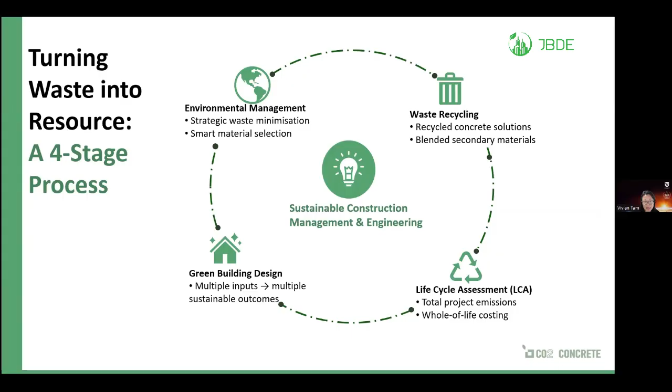You may see in here what is really the driving force for sustainable construction, since it is my major research area. Some people will look into climate change, or some are looking into protecting the environment, particularly in this perspective. But I think it's also very important to look into why the public needs to do it, what's the awareness to do it.

Do they have any financial incentive or financial benefits? Not only maybe the instant benefit, like the short term, but also looking into long-term components as well. And a lot of research also likes to look into energy efficiencies. How can the energy even help reduce the cost in this component?

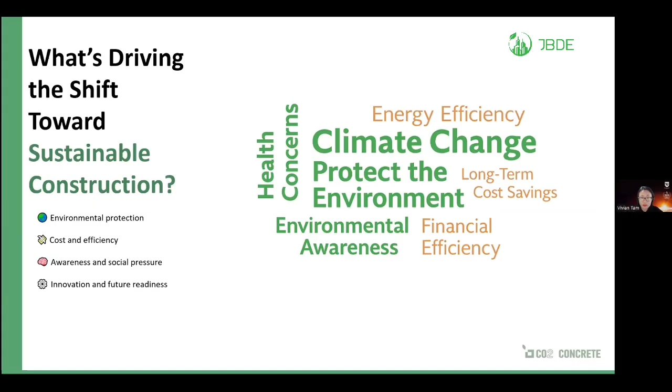There are three major trends that I can see when we are doing sustainable building or sustainability construction in here. The first one I want to highlight is the growing focus on healthy building materials. Building materials could be recycled materials or could be some other reusable materials. But the terminology of healthy is also looking into the long-term component as well. That means not only that you can reuse it again, but also how you can continuously help in terms of a healthy, productive environment in the long term.

Another one is the emphasis on embodied carbon. Because the net zero component is so important, a lot of us are looking into how we can achieve the carbon zero target. And all of those are looking into how we can really improve embodied carbon consideration as well.

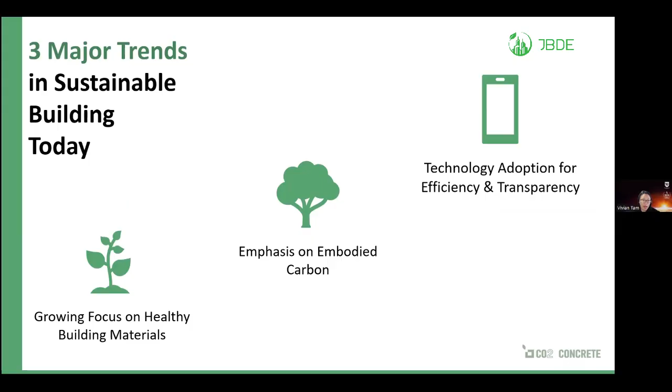And I have to say that we have to look into technologies if you want to look at those. Purely adopting the materials or purely reusing or recycling may not be able to achieve what we want, particularly for the building industry. That's why technology adoption is relatively important in looking into how we can embed it with the sustainable building component in here.

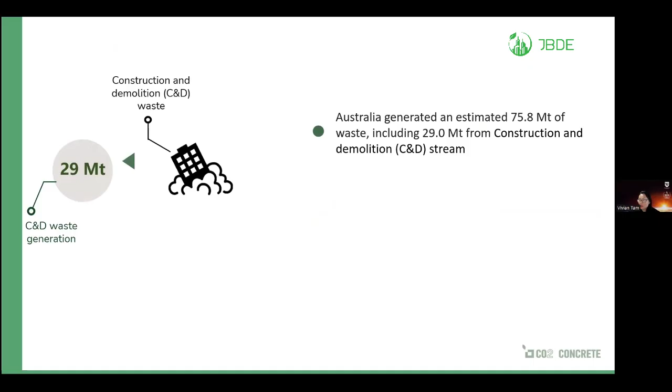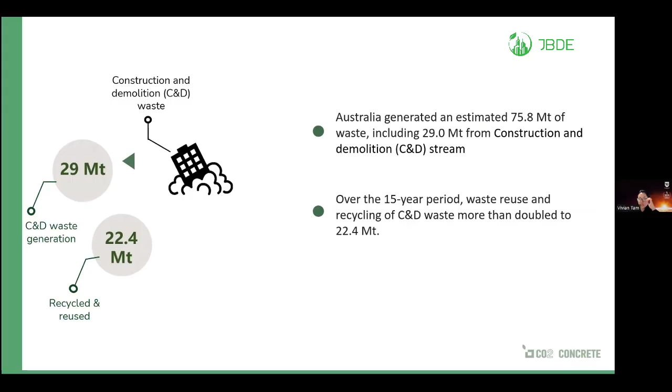Based on the Australian data, we have roughly about 29 million tons of construction and demolition waste every year. And we have recycled about 22.4 million tons, which is relatively high. But the thing is, we are not able to reuse it as a high-grade component. Most of it is still mainly used for low-grade recyclability options. That means when we want to use the materials as a replacement for virgin materials, it will be difficult to use. That is what the existing market looks like.

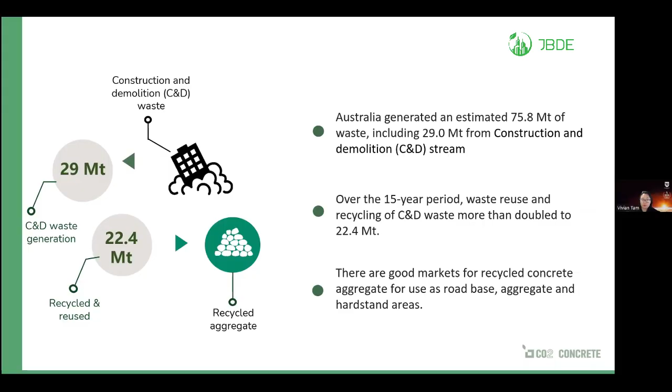Looking into construction and demolition waste recycling, a lot of people also like to see a four-step approach. Different people use different terminologies, but their approach is very similar. First of all, obviously, we try to prevent producing the waste, to not even generate the waste. But sometimes we have to generate waste, because for some activities on site you cannot just order the right amount. You have to order a little bit extra in case anything happens, and that means we will generate waste.

If we have to generate the waste, do we have any approach to separate the different types of waste? Because most waste is generated mixed together, which makes it very difficult for us to further reuse or recycle it as well. So separation is the second option.

And then the third level of waste recycling is treatment. Once we do the different kinds of waste sorting, we need to look into how we can treat the specific waste with the technology component. And when the product is mature, we also need a very mature market to support the use of those materials as well.

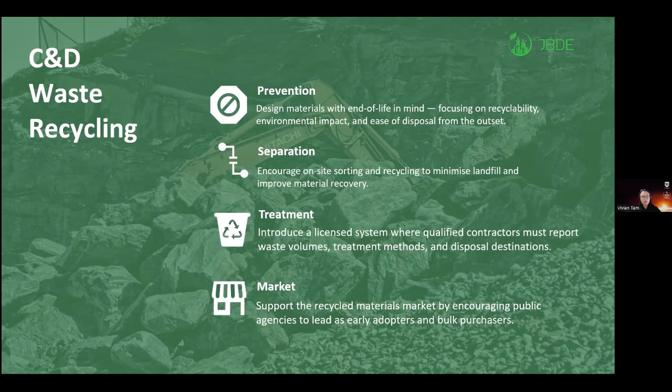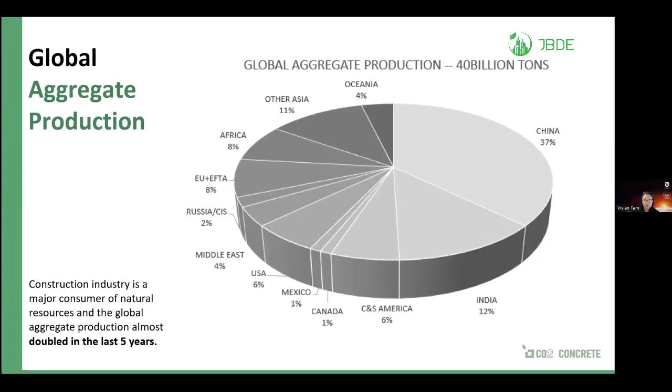I want to particularly focus on aggregate for today's presentation because I want to look into the research on recycled concrete. As you can see in here, global aggregate production is really high. It has doubled in the last 5 years, and the majority is generated from China, with over 37%. You can also see here a relatively comprehensive table highlighting different regions in the world, how much construction and demolition waste they produce, how much is recovered, and the recovery percentage as well.

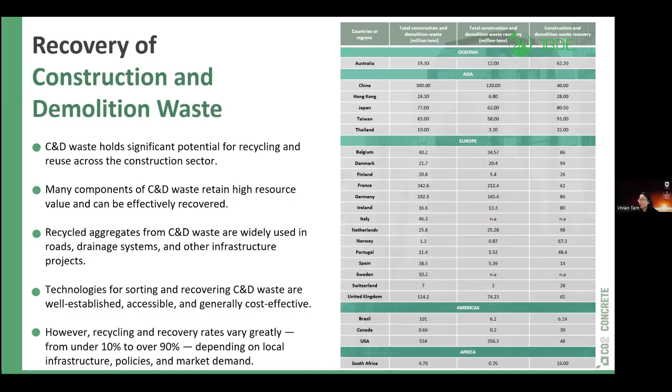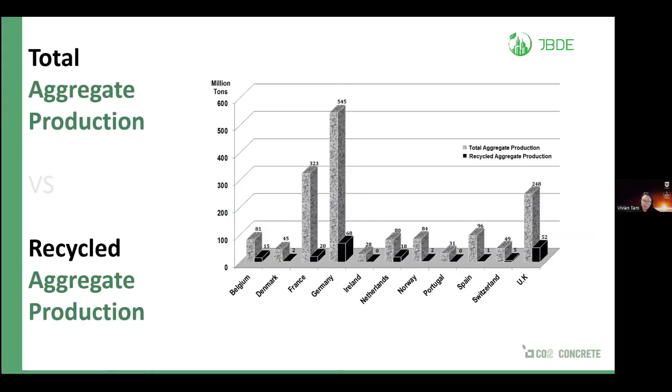Looking into the different kinds of aggregate production, you can see that the lighter bar is the total aggregate production, but the darker bar, which is the recycled aggregate production, is significantly low. That means we are not really able to use recycled aggregate for the majority of our aggregate production. Even when we use recycled aggregate, the majority is still mainly used for low grade. We are not able to use it for anything basically above the ground.

That is something that we will need to look into. There are a lot of different reasons behind it, but we will need to see why they are only mainly using it for low grade. And that doesn't mean that we cannot use it for better than just low grade applications.

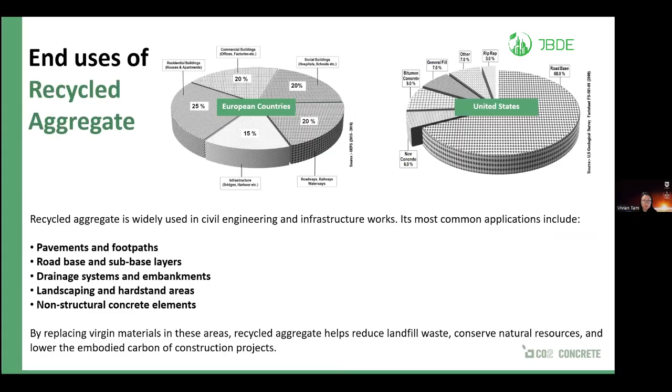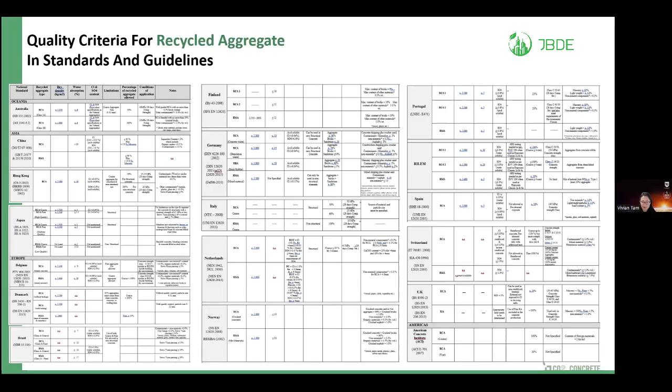That means we are very limitedly allowing the use of recycled materials in our standard guidelines. And that also gives hesitation in the industry to use this particular product, because there are no standards allowing it.

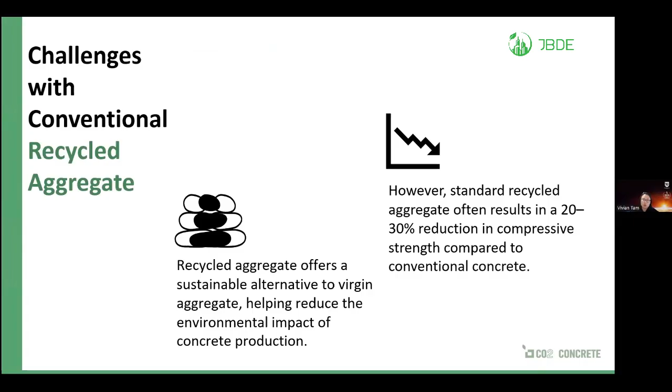And bringing it into the challenge, I think very clearly you can see that recycled aggregate is going to be an alternative to virgin material, and they actually reduce the environmental impacts of concrete production. However, because the performance is relatively lower compared to virgin aggregate, normally about 20 to 30% reduction in strength, it is also limited to different applications compared to what concrete is supposed to be able to be used for.

And we also have limited standards, as I highlighted in the last slide. There are limited standards and specifications allowing the industry to utilize recycled products. And we also don't have sufficient financial incentives. There's no encouragement for the industry to use these recycled products. And sometimes in certain countries, the C&D waste recycling facilities are a little bit far, so it's a bit hard to use recycled products compared to nearby sources of virgin materials.

It also has supply and demand issues, depending on how much we want, how much we can produce, and for what specific purpose. But I have to say, all in all, customer perception is probably the most difficult one to achieve. A lot of the industry is showing interest, but they may not have the confidence to use it because there are limited examples in the world that allow us to use it confidently. I often say in different magazines and interviews that the perception from the industry is still very limited here.

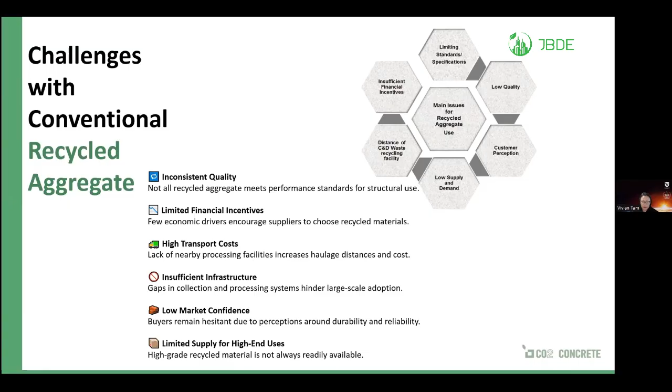And there's another idea for the recycled aggregate market. There are different directions showing approaches we could look into to help the market achieve better. For example, you can look into different taxations, including taxation on mining for sourcing virgin materials, and also taxation on landfills, which is mostly applied around the world already. That means we have a high tax on landfills compared to using or recycling products. And the third one is the availability and cost of recycled and virgin products. Most commonly, recycled products are significantly cheaper compared to virgin materials.

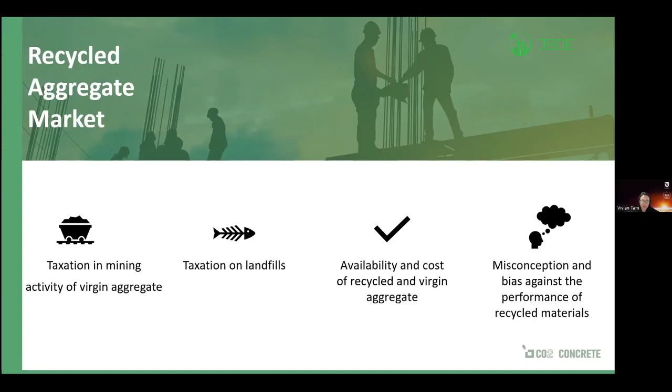That also helps us to boost the market in usage. But the last one, as I also mentioned in the last slides, there are misconceptions and also bias against the performance, because industry always thinks that a recycled product is something that is generally weaker. That's why it's very hard to pass that perception and also the bias in terms of adoption as well.

There are a few innovations in concrete in the recent market I also want to highlight here. You can see that there are a lot of different kinds of technologies. 3D printing, I think most of you heard about that, or different approaches to using concrete products, like different mixing designs or the healing process. The second one you can see here is using smart materials. A lot of them are using different kinds of products, such as carbon nanotubes or different nanomaterials, to put into the recycled concrete to help improve its performance. But that may also affect whether it can be recycled again as well.

And the third one is sustainability. A lot of us are actually looking into recycled concrete, low carbon concrete. Probably a lot of you also heard about that, and carbon capture and utilization. I mean, how can we really capture the carbon in the atmosphere and reuse it effectively? And often life cycle assessment is also brought in as well.

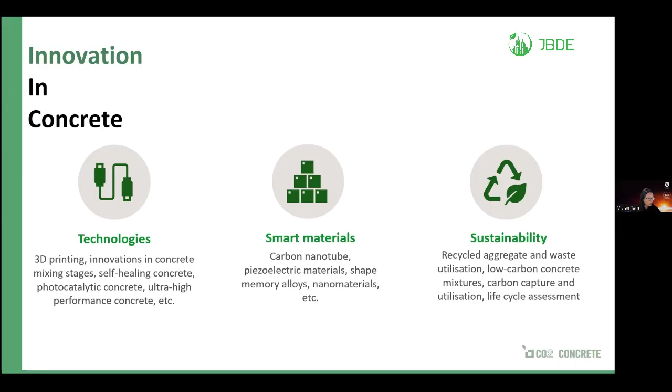From here I also want to highlight a little bit more on low carbon concrete. I don't know how many of you heard about low carbon concrete, because in Australia it's a really hot topic at the moment, probably for a few years now. What is low carbon concrete? It is concrete produced with a lower carbon footprint than traditional concrete. The cement component has the highest carbon emissions in concrete production.

That's why a lot of low carbon concrete is actually looking into reducing cement consumption. That means it is substituted with cement substitute materials such as fly ash or slag, most commonly. But we also have different kinds of cement substitute materials being generated to help produce this low carbon concrete. Overall, the idea is that low carbon concrete has a lower carbon footprint in terms of the life cycle components. That's what we call low carbon concrete.

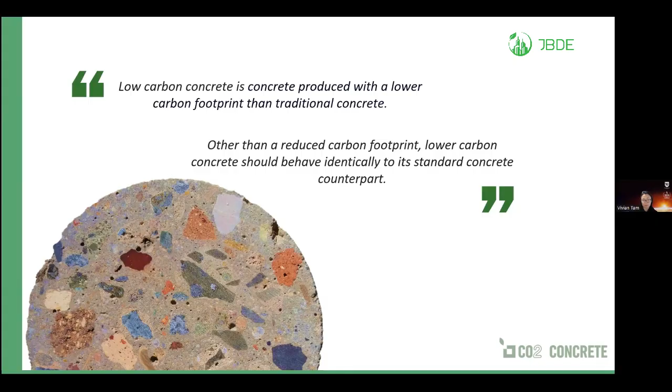From here on, I want to highlight one of the products, one of the inventions that has been invented over the last couple of years in the laboratory. In 2022, this particular product joined a CSIRO accelerator program. From then on, it actually made a big difference in terms of the impacts that we can produce with CO₂ concrete. Here you can see CO₂ concrete. We are naming it a concrete for a sustainable future.

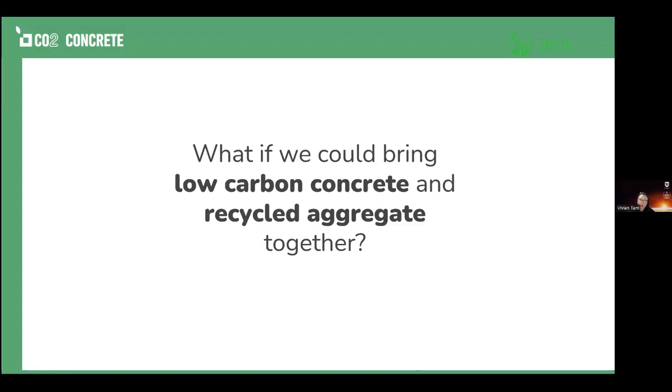I mentioned low carbon concrete is mainly looking into cement substitute materials. A lot of us are thinking, what if we could bring low carbon concrete and recycled aggregate together, because low carbon concrete uses cement substitutes, but we didn't recycle the waste component. What if we also replace the virgin material with recycled materials, that is recycled aggregate? That's why these two are a very good marriage together. That also helps concrete reduce embodied carbon and embrace a circular solution. That means we can recycle and recycle again, reduce emissions and also permanently sequester the carbon emissions as well.

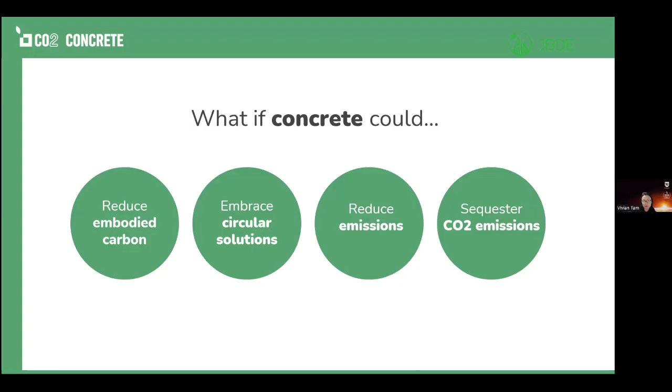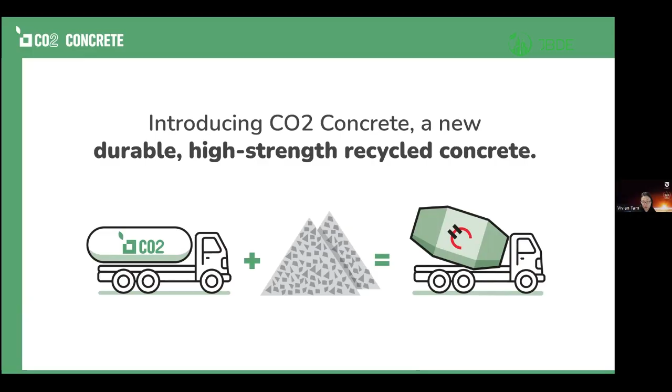That's why here I want to introduce CO₂ concrete to you. It is a new durable high-strength recycled concrete. What exactly is it? CO₂ concrete is a new process to produce durable and high-strength recycled concrete. We inject carbon dioxide into the recycled aggregate, mainly to improve its bonding, and then the rest of the process is the same. When the aggregate is improved, the recycled concrete performance will also be improved.

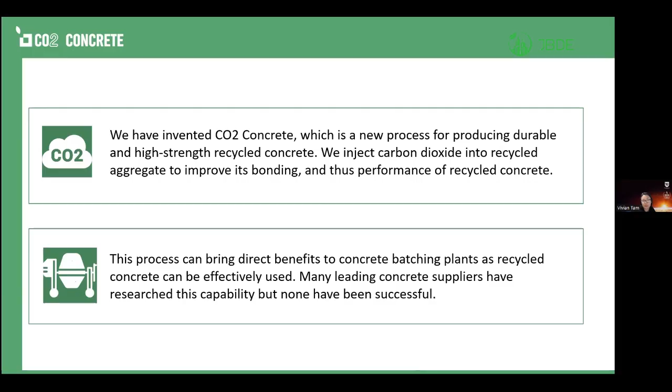It's about 50 centimeters by 50 centimeters by 30 centimeters, which is just really like a small black box. And you can put only about 50 kilograms of aggregates in. But in 2018, because we had slabs that needed to be poured for the universities, which require a relatively larger amount of materials, at that time we actually produced a commercialized scale carbonation chamber.

How we arrange it is the aggregate is put on top. Normally we use a bulk bag because we can put 1 ton of material in. We put in the bulk bag and then they will do the magic in terms of the carbonation inside. Once the carbonation process is done, the aggregate will come out at the bottom. Then we lift the whole chamber up using the heavy lifter in the laboratory, and then the materials can go out. And this is how we carbonate the materials. I cannot tell you exactly the process of how we're doing it because it is under a confidential agreement.

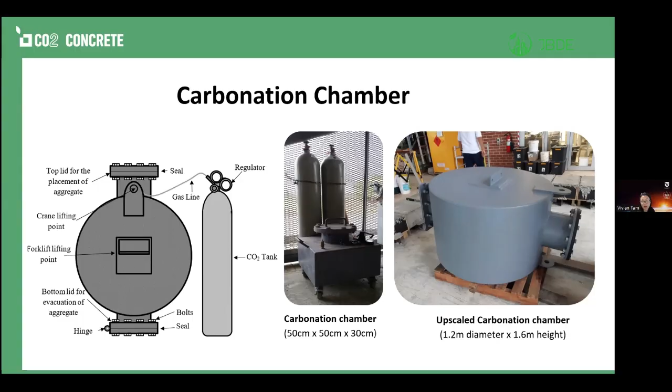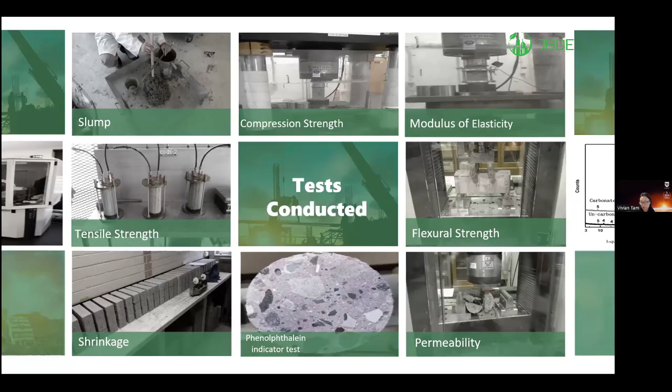And in the last few years in the laboratory, we have done any kind of test that you can imagine, not only the aggregate tests, but also the concrete tests as well. We have done the physical and mechanical properties, but also some of the durability tests and also the chemical behavior.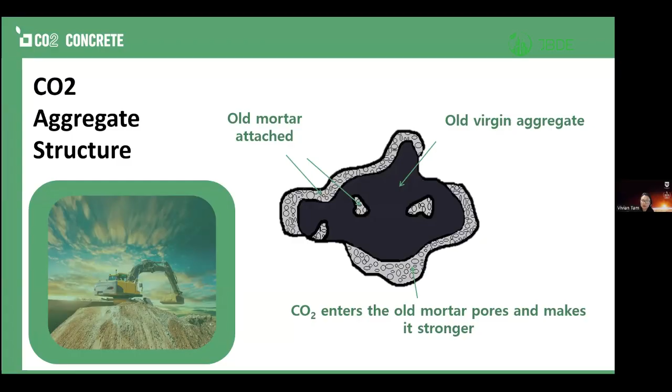You may ask me how exactly it works in terms of the recycled aggregate or the carbonation process. You can see that in the aggregate component, because it is a recycled aggregate, they not only have the old virgin aggregate attached, but they also have the cement mortar attached as well. Those are actually the weak components of the recycled aggregate. That is also the reason why the strength is reduced, because of the old cement mortar. But while we are carbonating the recycled aggregate, the carbon dioxide actually reacts with the cement mortar to help make it stronger. That is how this carbonation process works.

You can also see in this particular slide what virgin concrete looks like. If we purely replace virgin aggregate with recycled aggregate, at 100% replacement, the strength goes down about 30%. But by injecting carbon dioxide in, the strength actually goes back up, matching the performance of virgin concrete.

Not only does the performance increase, the cost is also efficient. In rough data, it is about $300 per cubic meter for virgin concrete. Because recycled aggregate in general is about half the price of virgin aggregate, the cost will go down, but the strength also goes down. By injecting carbon dioxide into the recycled aggregate, the strength goes up, and although the cost will go up, overall we still have about a 10% cost reduction in the 100% CO₂ concrete compared to virgin concrete.

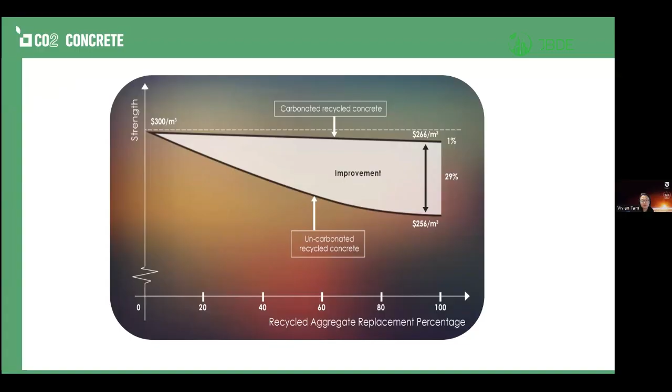If the company can tell this model what the input looks like, that means what the mix design looks like, how much you want, you can also put your restrictions in as well. Say, for example, you don't want to use more than 50% of the recycled aggregate. You can put those in as well. Then we'll be able to tell you how strong that concrete will be, what its behavior is, I mean, how many MPa the concrete will have.

Or alternatively, a lot of industry will be looking at it the other way: I want to achieve a 35 MPa concrete, you tell me how to do it. That means from output to input. And here I can also do that as well. That means you can put in the target strength and certain kinds of limitations. Say, for example, you want to reduce the amount of cement or reduce the amount of aggregate.

We can also put those in, then I'll tell you how to do it. That means it's a two-way component: you can give me an input, I can tell you the output. Or you tell me what output you want, I can tell you what inputs are required. That's why this particular model is very efficient in terms of the mix design component here.

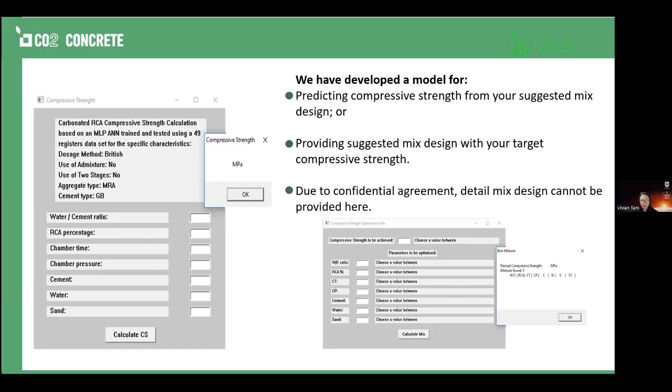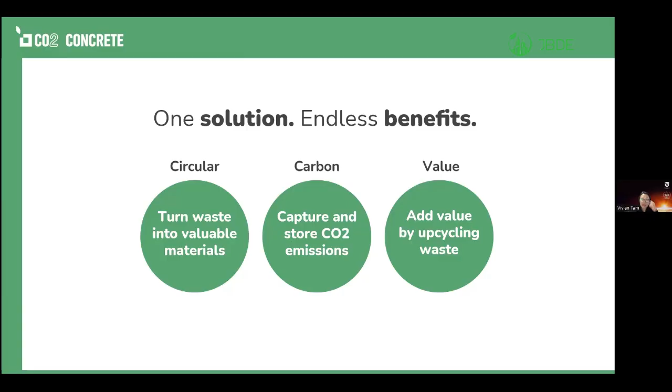And you can see that this project is able to bring one solution to endless benefits. Not only about helping the circular components, we can turn waste into valuable materials, but we can also permanently sequester and store the carbon emissions in the concrete. Because the behavior of the concrete also improved, we actually upcycle the waste and provide added value products in this particular component.

During the hosting program, we were able to produce a commercial video to help explain how this production process works to the industry. We have produced a 90 seconds video here. Please let me know if you can't hear it.

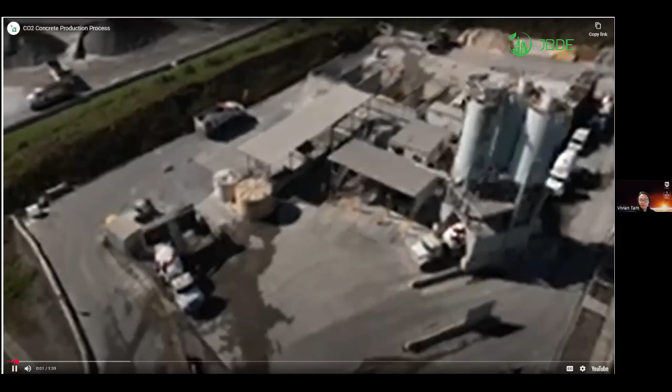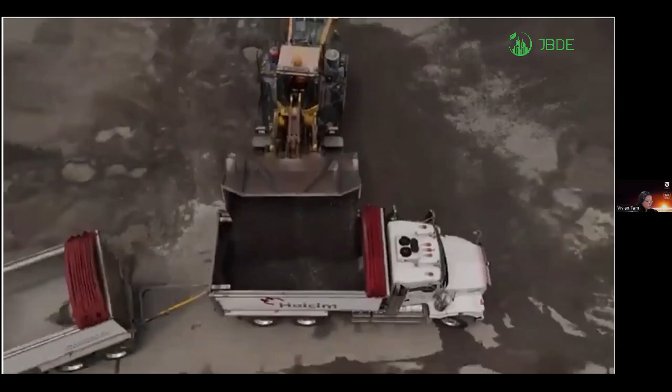The world is in a race to reduce the amount of human-induced carbon being emitted into the atmosphere. One of the biggest emitters of carbon is concrete. After water, concrete is the most widely used substance on the planet. In just the time it took to get to this point of the video, 19,000 bathtubs of concrete have been poured. Traditionally, when a building is demolished, the old concrete is never repurposed, making its way to landfill. What if there was a way of not only recycling the concrete, but also using the concrete as a vehicle to capture and store carbon created during the manufacturing process?

Introducing CO₂ Concrete, a revolutionary new durable high-strength carbon capture concrete that uses recycled aggregates in conjunction with low-carbon cement. These treated recycled aggregates are fed into a chamber where they are injected with CO₂, which not only improves the quality of the aggregate, but also its performance. The CO₂ treated aggregates are then taken to a concrete plant to be used in the final concrete mix. The result is a more sustainable building with a reduced carbon footprint. This is a truly circular economy solution that turns construction waste into recycled materials without compromising performance. CO₂ Concrete.

Okay, this is just a very quick video highlighting what we have done so far. Sorry, I did mute it.

Okay, and for this particular 9-month program, we were also targeting 3 main milestones to achieve. One is to determine the viability, to ensure that our business model works and the life cycle component works as well. Another one is the demonstration slabs. We have poured a few slabs; I'll show you a little bit later. And the last one is the communication strategies, in terms of different kinds of social media. You can also see this PowerPoint is designed in a different way because that is also part of our communication strategies.

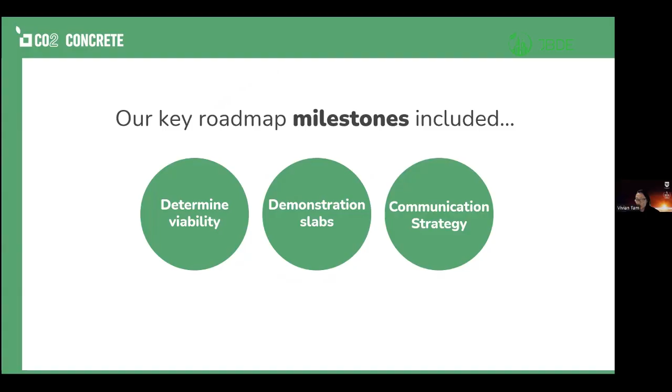This research has been conducted in the laboratory over the last 10 years now. As I mentioned, one of our main goals in this project is to produce the commercial demonstration slabs. We have done different kinds of slabs in the university environment, but we were really keen to produce commercial slabs. That's why in October 2022, we managed to pour the first commercial concrete at the Blacktown Animal Rehoming Centre. It's still at the Blacktown Rehoming Centre.

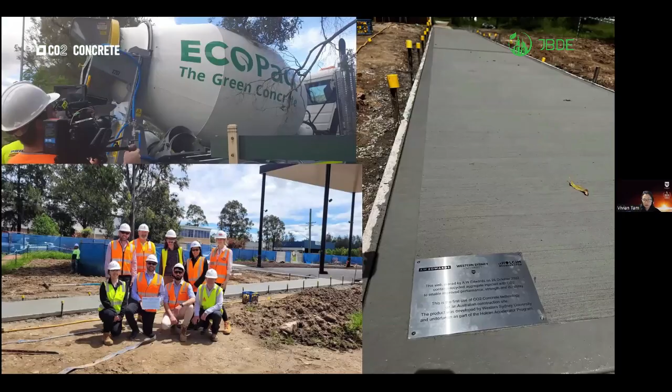Although the program finished in 2022, the industry relationship hasn't finished. We still want to engage further in this kind of research. That's why we have a second commercial concrete slab, exactly about 1 year after the first slab, poured at Edmondson Park North Commuter Carpark. In this one, we increased the replacement percentage. The first commercial slab was done with 40%, because, if you remember, the international standard is roughly about 30%, and we wanted to go over it. This one we pushed to 50%.

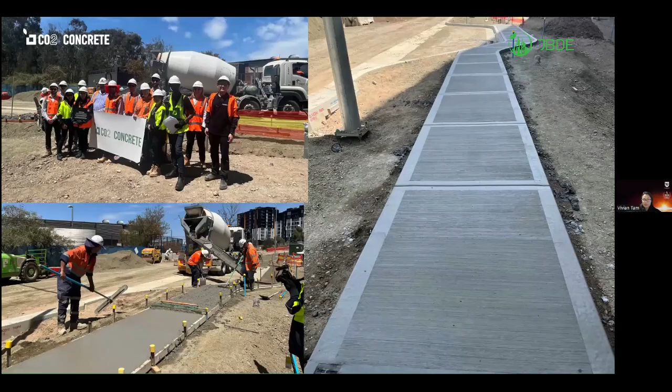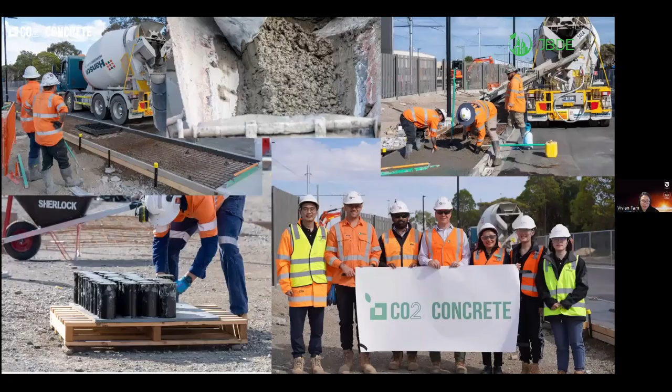After the second commercial slab in New South Wales, we also managed to do a third one, but outside the state. We did that in Victoria at the Maidstone Tram Maintenance Facility this year, in March. You can see we have a whole lot of new partners compared to the last ones. We are using different suppliers and different materials as well, but the product is still working perfectly.

And if you can see in the left bottom figures, we are also pouring some cylinders to bring back to Sydney to do some continuous testing. At the moment, we are still conducting different kinds of testing to see the behavior of it with the commercial product. That's why these three slabs are the main thing that we have produced so far.

And this particular one, we have also pushed the limit. We are pushing from 40, 50, and this one is a 60% replacement. And what we are aiming is to further increase that particular replacement percentage as well.

And this particular product was also named under the 100 Climate Conversations under the Powerhouse Museum. At that time they were looking each week to target one of the climate leaders with their products. And 100 Climate Conversations is 100 weeks of discussion, so it actually lasts over 2 years. And this particular one was done in one of the weeks as well, and one of the interviews is still available online. And the link, I think, is in here as well.

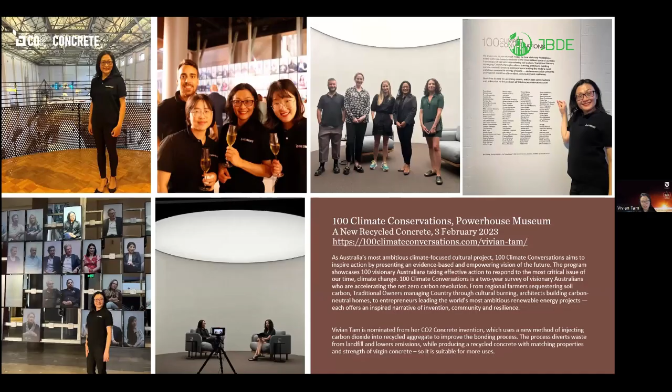In here, close to the end, I want to highlight that there's a lot of information that I can share with you on CO₂ Concrete or with these particular inventions, but I can't really share all the details. If you're interested, please go to the website. It's CO2concrete.com.au. You can see the technology approach that we're using and the different kinds of demonstration slabs that we have done. I'm also sharing the different publications that we have in here as well.

In here, just a quick summary. I just want to highlight the roadmap of what we have done so far. This particular research was started about 2015 as a very conceptual design. We joined the top 8 research teams in Australia in 2017 under the Innovyz program. At that time, the product was probably still a bit in the early stage. And then after further development, in 2022, we were under the Holcim Accelerator program. And then we have also done the 3 different slabs, as I shared with you in today's presentation.

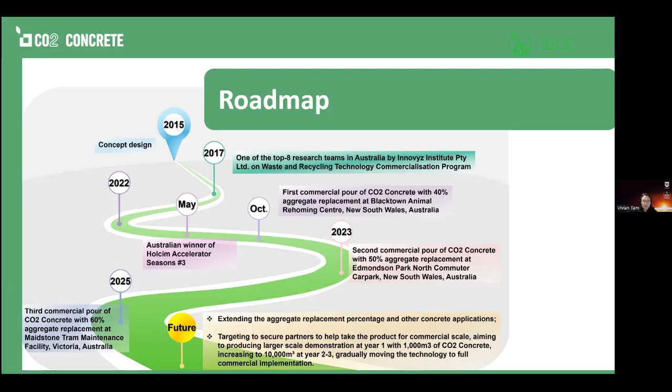But the next step is we really want to look into technology transfer or see any other industry that is interested that we can partner with. And with this roadmap, we are also sharing a 3-minute journey video to highlight what our journey looks like.

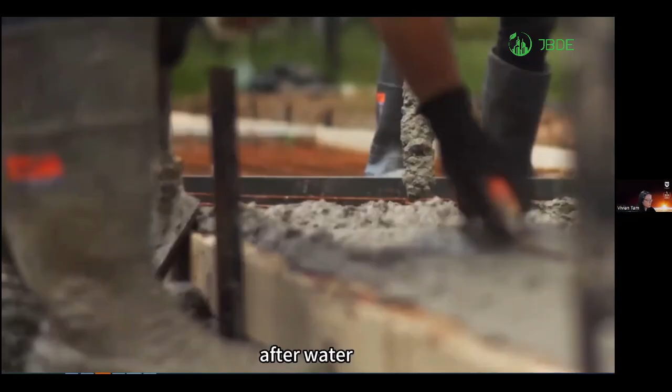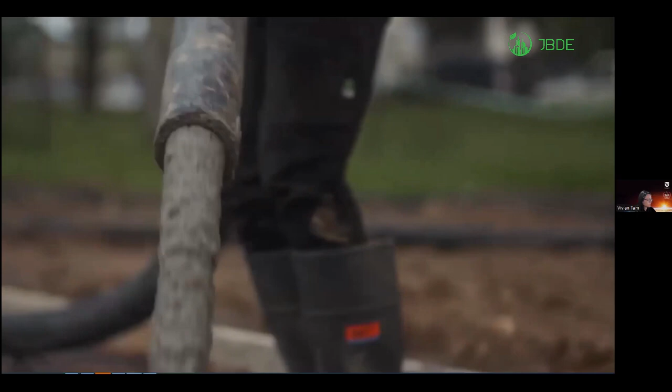The world is in a race to reduce the amount of human-induced carbon being emitted into the atmosphere. One of the biggest emitters of carbon is concrete. After water, concrete is the most widely used substance on the planet. In fact, every second, 19,000 bathtubs can be filled by the poured concrete globally. Traditionally, when a building is demolished, the old concrete is never repurposed, making its way to landfill. What if there was a way of not only recycling the concrete, but also using the concrete as a vehicle to capture and store carbon created during the manufacturing process?

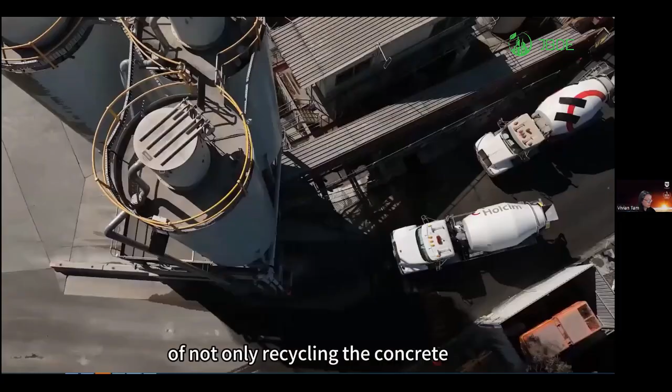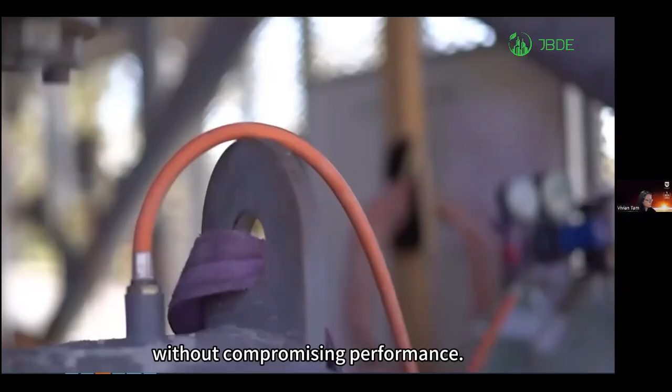Introducing CO₂ Concrete. A revolutionary new, durable, high-strength carbon capture concrete that uses recycled aggregates in conjunction with low-carbon concrete. These treated recycled aggregates are fed into a chamber where they are injected with CO₂, which not only improves the quality of the aggregate, but also its performance. The CO₂ treated aggregates are then taken to a concrete plant to be used in the final concrete mix. This is a circular economy solution that transforms construction waste into recyclable material without compromising performance. The carbonation process is not publicly available due to a confidentiality agreement.

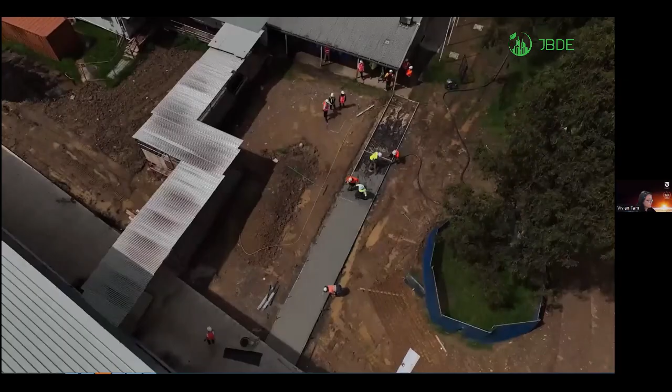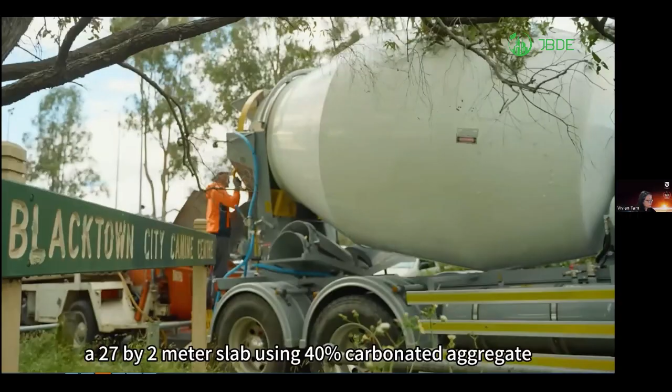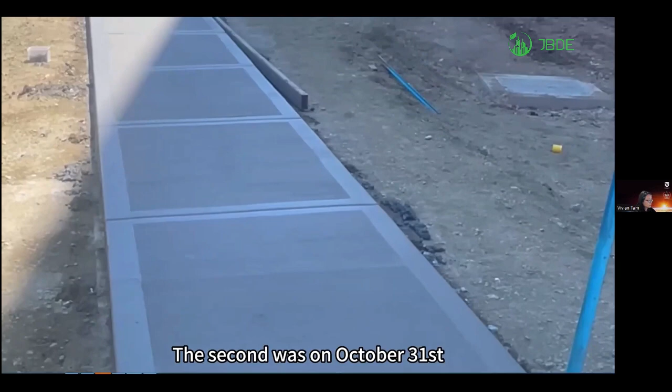The journey of CO₂ Concrete has been marked by continuous progress and breakthrough innovation. The first successful pour was completed on October 26, 2022, at the Blacktown Animal Rehoming Centre in Sydney. A 27 by 2 metre slab, using 40% carbonated aggregate. The pour was carried out in partnership with Holcim, A.W. Edwards, Bouygues, Sika and Mark McDonald. The second was on October 31, 2023, at Edmondson Park North Commuter Car Park. A 25-metre pathway was poured with 50% carbonated aggregate with support from Holcim, A.W. Edwards, Transport for NSW, Liverpool City Council and Western Sydney University.

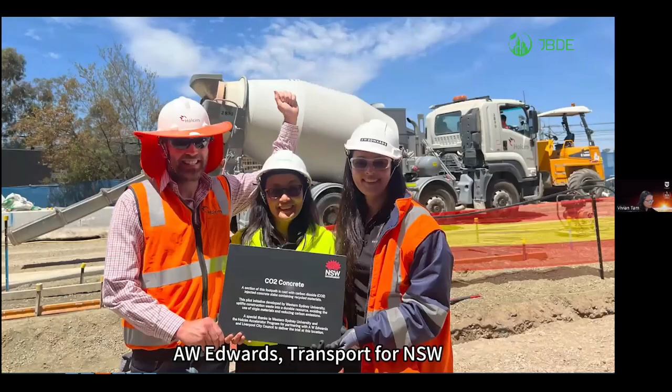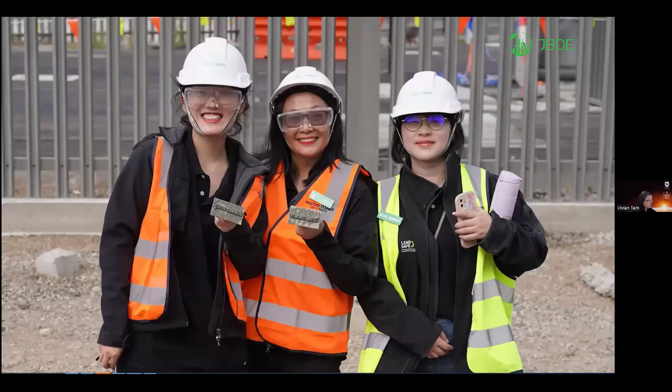The third took place on March 12, 2025, at Maidstone Tram Maintenance Facility in Victoria, in collaboration with Heidelberg Materials, Alex Fraser and the Northwestern Program Alliance. This 25-metre pathway reached a 60% replacement rate, our highest yet. Each pour builds momentum, pushing CO₂ Concrete closer to mainstream adoption. Looking ahead, we will continue to promote this product, working closely with government to ensure that the implementation of innovative solutions strengthens industry demand. With collective effort, we believe every step we take brings us closer to building a better and cleaner Australia.

You can also see that there are different partners engaged in the project so far as well. Next one. And I just want to share a little bit of my journey from my passion to innovations.